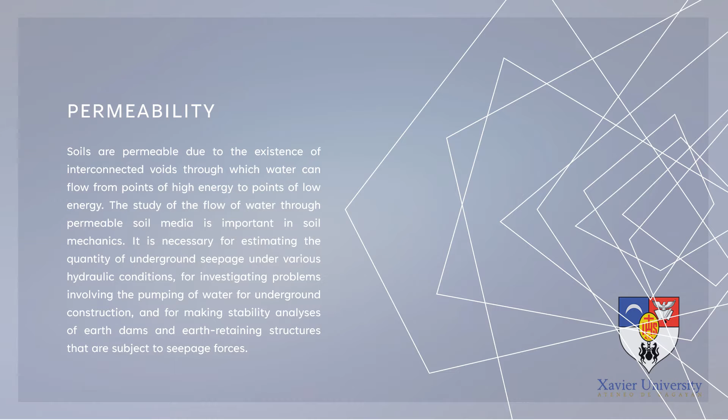So the study of the flow of water through permeable soil media is important in soil mechanics. It is necessary for estimating the quantity of underground seepage under various hydraulic conditions, for investigating problems involving the pumping of water for underground construction, and for making stability analysis of earth dams and earth retaining structures that are subject to seepage forces. So I know we are all familiar with Bernoulli's equation.

So from fluid mechanics, we know that according to Bernoulli's equation, the total head at a point in water under motion can be given by the sum of the pressure, the velocity, and the elevation heads. H, or the total head, is equal to the pressure head, which is equal to pressure over the unit weight of water, plus the velocity head, which is equal to velocity squared over 2 times the acceleration due to gravity, plus elevation head, which is equal to z.

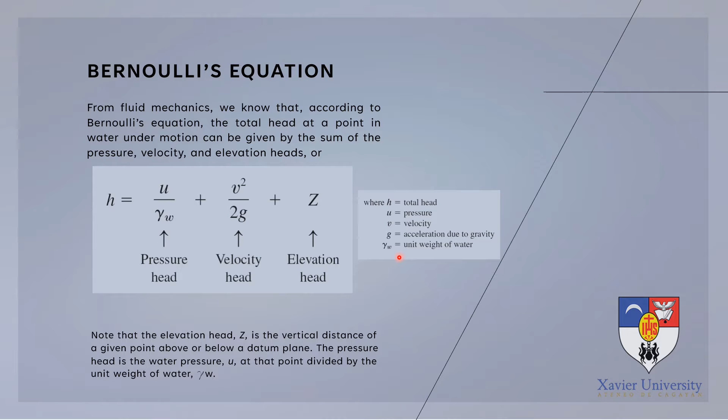So note that the elevation z here is the vertical distance of a given point above or below a datum plane. The pressure head is the water pressure U at that point divided by the unit weight of water, or gamma water. So if Bernoulli's equation is applied to the flow of water through a porous soil medium, the term containing the velocity head can be neglected because the seepage velocity is relatively small, and the total head at any point can be adequately represented by this one.

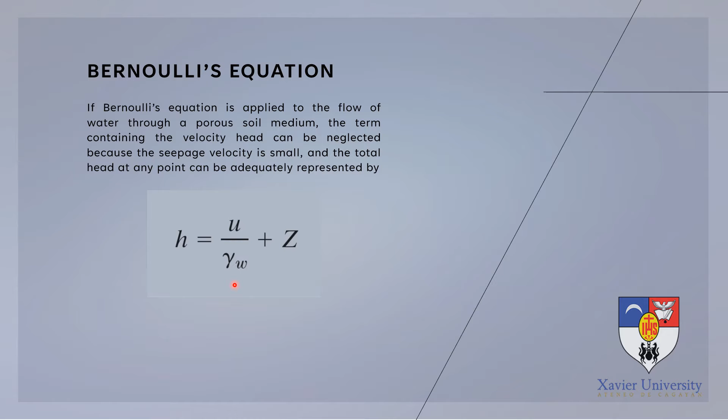As we have learned in our fluid mechanics subject, we have gotten to know the piezometers, which are open standpipes that are inserted into the porous soil, so we can get the pressure of the water inside. So open standpipes called piezometers are installed at points A and B. The levels to which water rises in the piezometer tubes situated at points A and B are known as the piezometric levels of points A and B respectively.

The pressure head at the point is the height of the vertical column of water in the piezometer installed at that point. Upon the insertion of this piezometer into the porous soil, the water will rise, and the pressure head at this point is the height of the vertical column of the water in this specific piezometer.

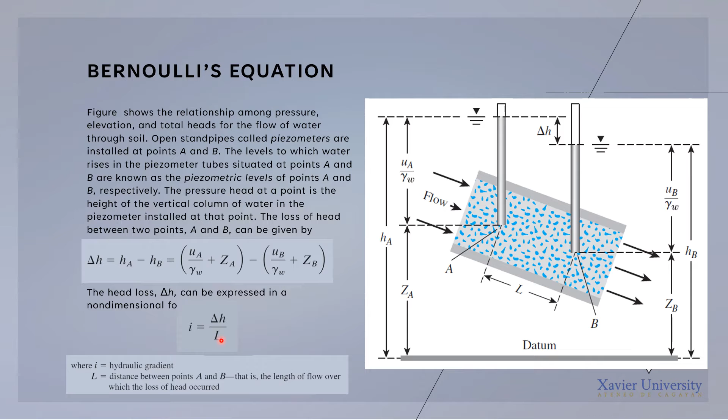So actually, hydraulic gradient plays a very big role when it comes to flow of water in a porous soil. So this formula can also be used interchangeably, whenever applicable, together with these equations.

So let us talk more about hydraulic gradient. So when the hydraulic gradient is increased gradually, so meaning hydraulic gradient, it is actually slope, no? The rise, which is the head loss, over the length of the flow of water, or the distance between 2 points. So hydraulic gradient is a slope. So if it is increased gradually, the flow remains laminar, no?

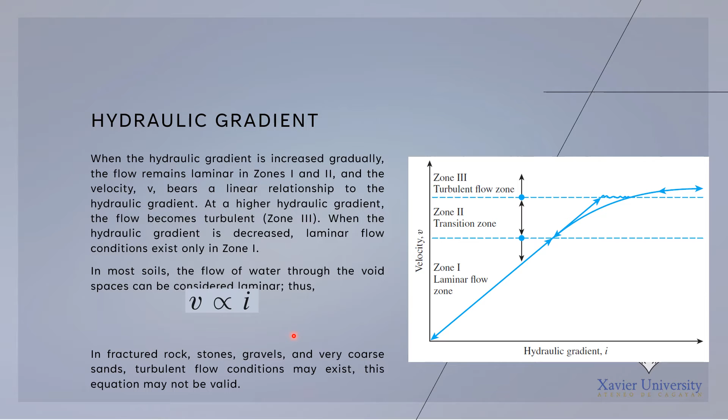So, when the hydraulic gradient is decreased, laminar flow conditions exist only in zone 1. So, in most soils, the flow of water through the void spaces can be considered laminar. So, meaning, this can be interpreted through the expression, velocity is directly proportional to the hydraulic gradient. So, in fractured rocks, stones, gravels, and very coarse sands, turbulent flow conditions may exist. So, this equation may not be valid.

So, now let us talk about Darcy. So, in 1856, Darcy published a simple equation for the discharge velocity of water through saturated soils, which may be expressed as V is equal to Ki. So, V in here is the discharge velocity, which is the quantity of water flowing in unit time. And K in here is the hydraulic conductivity, or our coefficient of permeability. So, this equation was based primarily on Darcy's observations about the flow of water through clean sand.

So note that these two equations below are similar and both are valid for laminar flow conditions and applicable for a wide range of soils. Our discharge velocity is directly proportional to our hydraulic gradient. So if we convert this statement or expression into an equation, we would have to replace this symbol here with the equal sign, and we would have to add the coefficient here, which is the letter K, which represents our coefficient of permeability.

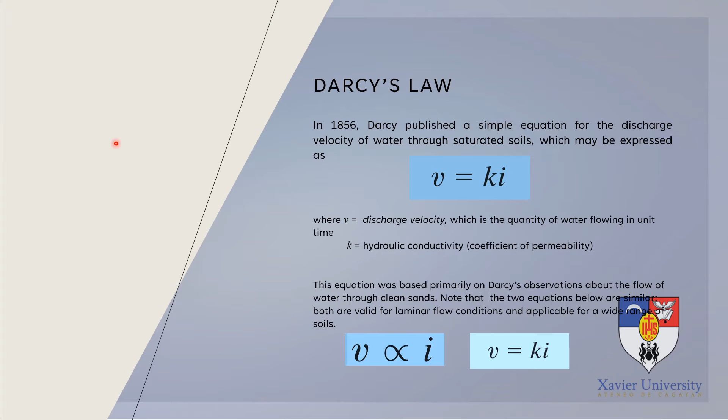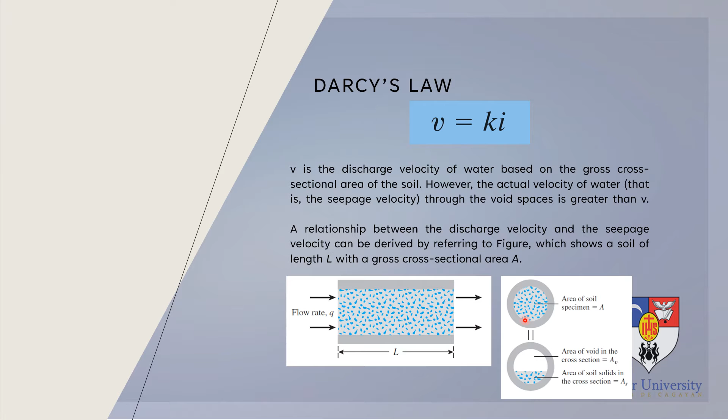Alright, so if the quantity of water flowing through the soil in unit time is Q, we know that Q is the rate of flow, which is equal to A times the discharge velocity, or equal to the area of the voids times the seepage velocity, or seepage velocity is equal to the discharge velocity over the porosity.

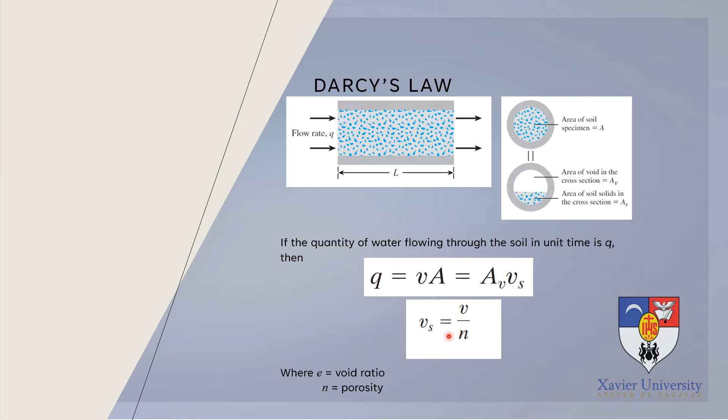So now let us talk about hydraulic conductivity. V is equal to Ki according to Darcy. We have already talked about the i, which is the hydraulic gradient, and the Q, which is the rate of flow. And now let us talk about the letter K, and what does it represent? That is the hydraulic conductivity. It is the ability of the porous medium, or the soil, for instance, to transmit water under saturated or nearly saturated conditions. So this is a measure of how much a soil can transmit water through it.

So hydraulic conductivity is generally expressed in centimeters per second or meters per second in SI units, and in feet per minute or feet per day in English units.

The hydraulic conductivity of soils depends on several factors: fluid viscosity, pore size distribution, grain size distribution, void ratio, roughness of minerals, and degree of soil saturation. In clay soils, structure plays an important role in hydraulic conductivity. Other major factors that affect the permeability of clays are the ionic concentration and thickness of layers of water held on to the clay particles.

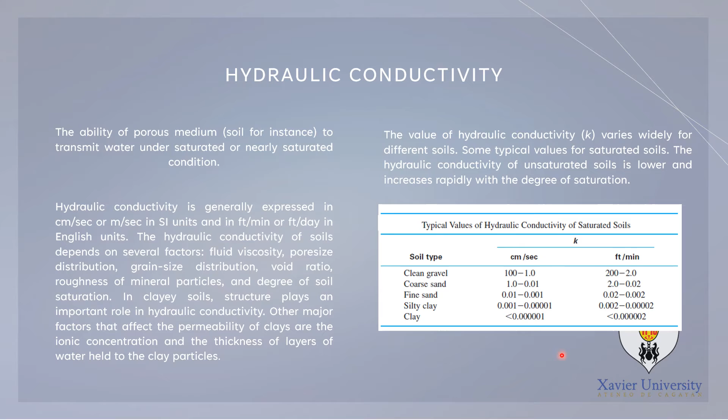The hydraulic conductivity of a soil is also related to the properties of the fluid flowing through it by an equation: K is equal to gamma water over the viscosity of water, times the absolute permeability. So this is another equation for our hydraulic conductivity if we base our determination of it on the properties of the fluid flowing through our soil.

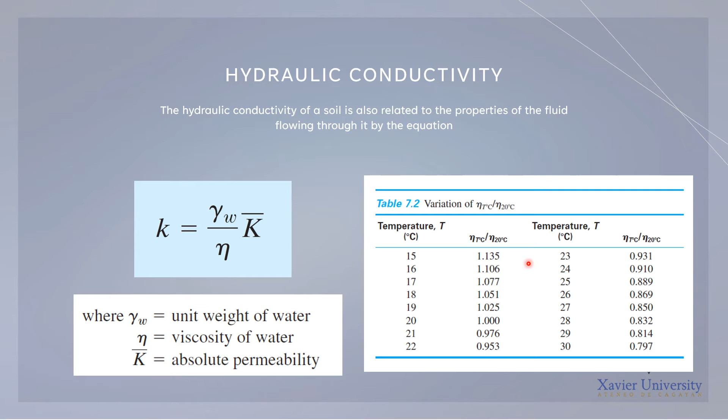As much as other properties of our soil, the determination of the hydraulic conductivity of our soil can also be done in the laboratory through two most common methods: the constant head permeability test and the falling head permeability test.

Let us first talk about the constant head permeability test. A typical arrangement of the constant head permeability test is shown in this figure. In this type of laboratory setup, the water supply at the inlet is adjusted in such a way that the difference of head between the inlet and the outlet remains constant during the test period.

After a constant flow rate is established, water is collected in a graduated flask for a known duration. The total volume of water collected in this flask may be expressed by the equation Q equals A times V times T, where the discharge velocity is equal to K times I. The hydraulic gradient I is equal to the slope, H over L, the pressure head over the length of flow.

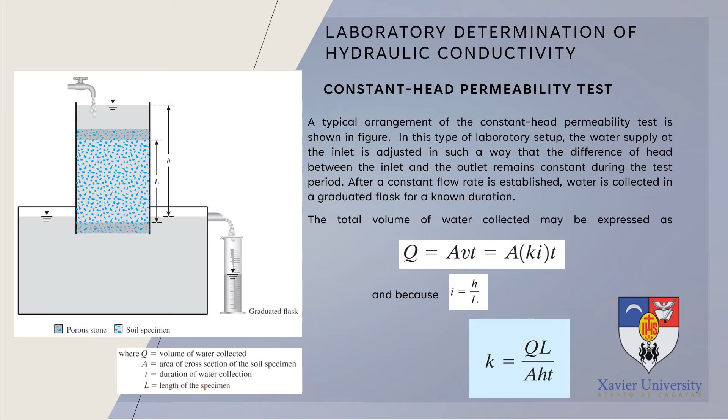So this water will be allowed to penetrate this soil over a certain period of time. That time is what the letter T represents here. So now let us talk about the falling head permeability test.

The mechanism is the same. Water will be allowed to penetrate the soil, and then measurement will be conducted later on. Its appearance is just different - we have a standpipe.

Now, this is the typical arrangement of the falling head permeability test. Water from a standpipe flows through the soil here, and it will penetrate our soil.

So the initial head difference H1 - we have H1 here - at time t equals 0 is recorded, and water is allowed to flow through the soil specimen such that the final head difference at time t2 is H2.

If we put water, we measure that as H1, and then we allow that water to penetrate this soil over time until it goes down, since some of it penetrates and some other water moves in. So that water level that was originally here goes down since some has penetrated. That is our H2 at time 2.

So we can compute our hydraulic conductivity, which is denoted by small letter k. It's the same as in constant head permeability - what we solve for here is the hydraulic conductivity or the coefficient of permeability, which is the letter K in the formula.

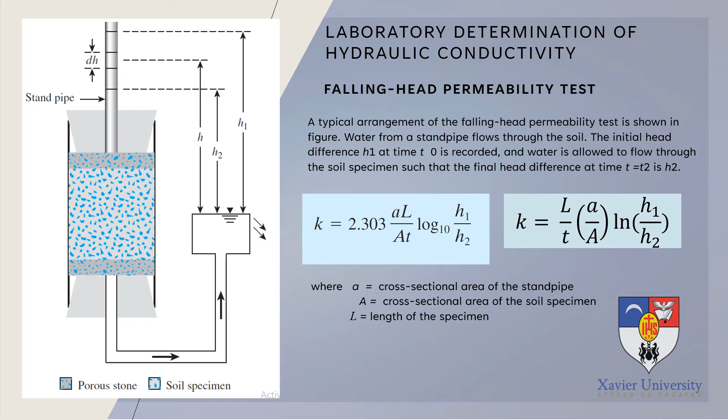Okay, so we have here a sample problem. First, let us have a sample problem for the constant head permeability. We have here figure A. A test gives these values - L is already given, A is already given, constant head difference H is given, water collected in a period of 5 minutes - that time is 5 minutes. The volume of water collected is 350 cubic centimeters.

As always, in any problems that we have to deal with, we have to be very careful of the units given and the units we are asked for. So in cases where 5 minutes is given as the time, and it asks to calculate the hydraulic conductivity in centimeters per second - the centimeters part is fine since everything matches - but the 5 minutes we have to convert later into seconds.

So when we talk about constant head permeability, there's only one equation we automatically use: K is equal to QL over AHT. Given Q, which is 350 cubic centimeters, L is 30 centimeters, A or the area of the specimen is equal to 177 square centimeters, our constant head is equal to 50 centimeters, and the time of our test is 5 minutes, which we have to convert into seconds.

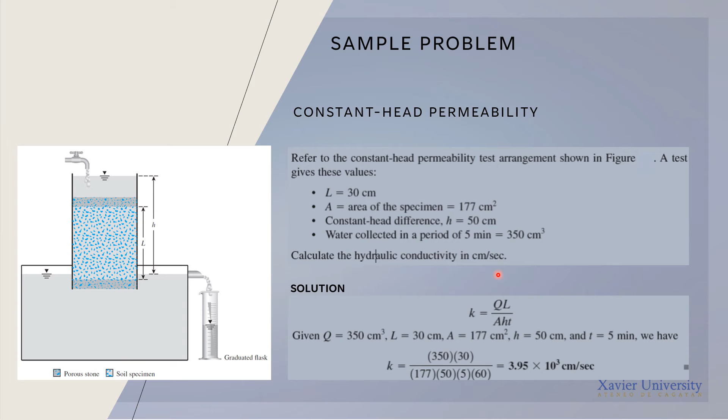So for the falling head permeability test, there's only one formula to use here. The problem will give values for the length of the specimen, the area of the soil specimen, and the area of the standpipe, which is the small letter a and the big letter A.

And the head difference at time 0, or H1, which is equal to 20 inches, and H2 after 180 seconds, which is our T, H2 now becomes 12 inches. So we are asked to determine the hydraulic conductivity of our soil in inches per second. All our units are fine since we're already in inches and seconds.

So automatically, when given a problem about falling head permeability test, we use this formula, the one with ln. It's actually easier to memorize, and in the board exam it is more commonly used than the other one, because there's less to write.

Anyways, in this problem by Braja Das, he is using this formula. Actually, if you use the other equation, you will still arrive at the same value for your hydraulic conductivity. So this is the formula for our hydraulic conductivity.

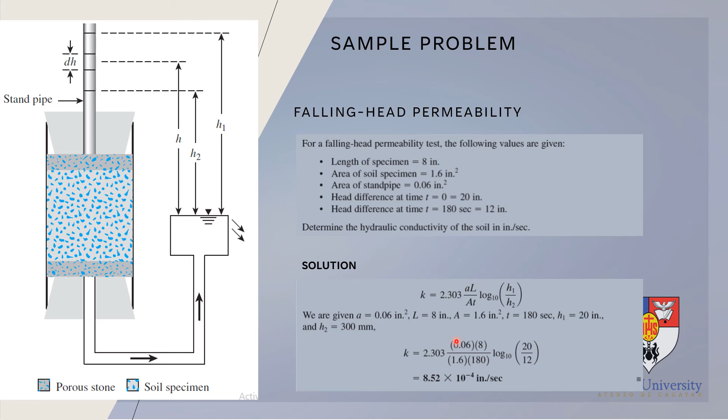So basically, board exam problems related to this somehow just look like this. You just have to memorize the formula and then identify which parameter is given, so you can correctly substitute to come up with the right answer.

So basing on a problem about hydraulic conductivity, if the given is only the void ratio, D10, and Cu, for granular soil, depending on what's given — if those earlier ones like H, area of the specimen are not stated — you are asked to solve for the hydraulic conductivity using what is given in the problem.

So at least you know that there are equations that exist establishing the relationships for hydraulic conductivity. It also applies to cohesive soils, where we have the void ratio. So you can solve the hydraulic conductivity if those parameters, data, or properties of the soil are given.

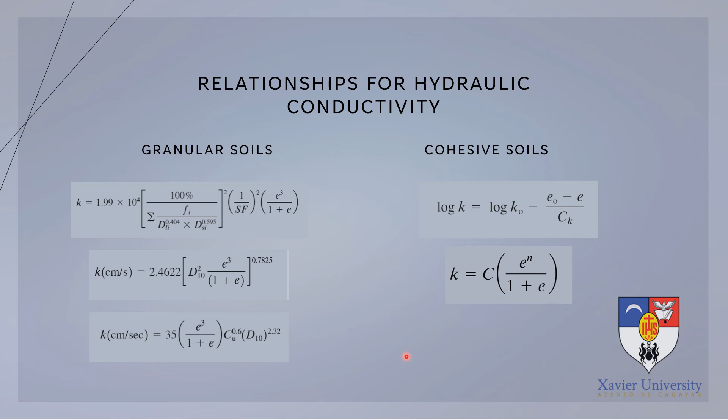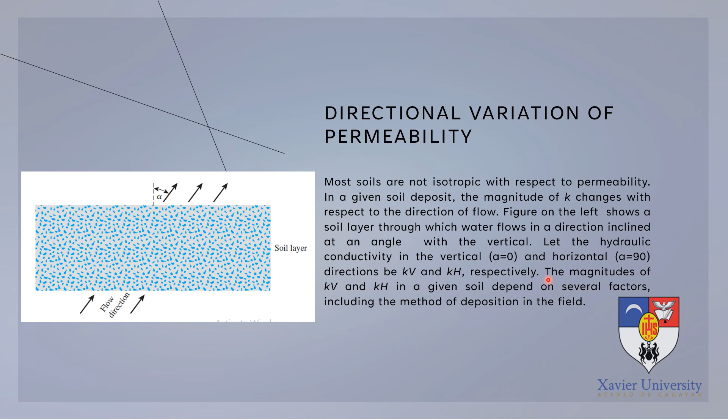Murag gi-anticipate lang niya, no? Now, what if the flow of the water is at an angle with the vertical? So we have to get the K equivalent in the vertical and horizontal, which is KV and KH respectively. The magnitudes of KV and KH in a given soil depend on several factors, including the method of deposition in the field.

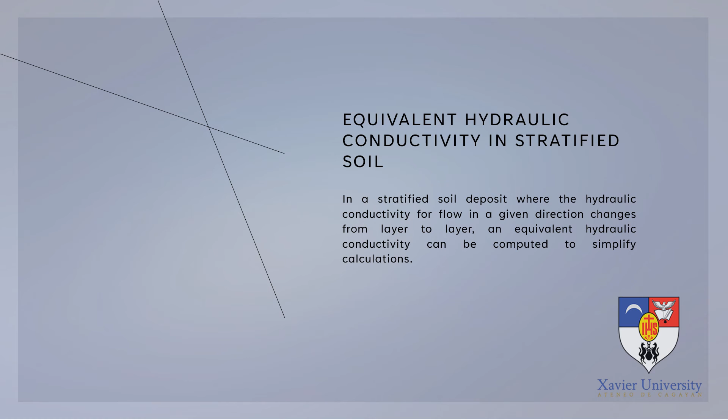So we have the equivalent hydraulic conductivity in stratified soil. In a stratified soil deposit where the hydraulic conductivity for flow in a given direction changes from layer to layer, an equivalent hydraulic conductivity can be computed to simplify. So if the problem is asking us for the equivalent hydraulic conductivity in the horizontal direction, muna siya nga formula atong gamiton.

Kay murag gibutang niya in consideration nga ang flow of the water within our soil strata is not uniform. It could be at an angle with the vertical, or in any other direction. So at least we can get the horizontal and vertical equivalent of our hydraulic conductivity regardless of the direction of flow. So, diretso lang ta.

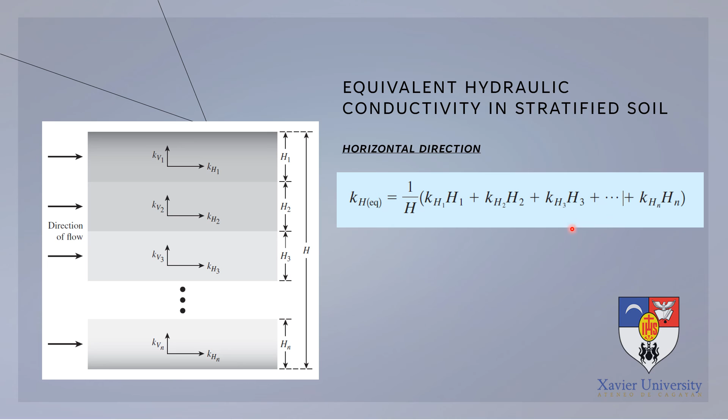The formula for KH equivalent is equal to 1 over H, which is the total thickness of our soil strata, times KH1 H1. K here is the coefficient of permeability in this specific layer 1. Layer 1 has its own hydraulic conductivity and its specific height. So multiply them for each layer, and then sum up each product: KH1 times H1, KH2 times H2, KH3 times H3. Isum lang nimo, then you will get your KH equivalent.

For the vertical direction, same parameters gyapon. Still H, which is the total thickness, and H1, the thickness of layer 1, and the hydraulic conductivity of layer 1. But instead of a product, you have to divide the thickness of that layer by its hydraulic conductivity. So when asked for the equivalent hydraulic conductivity in the vertical direction, automatically this is the equation that we are going to use.

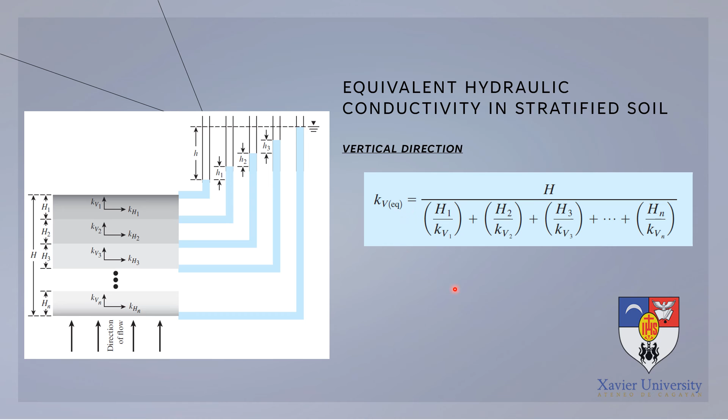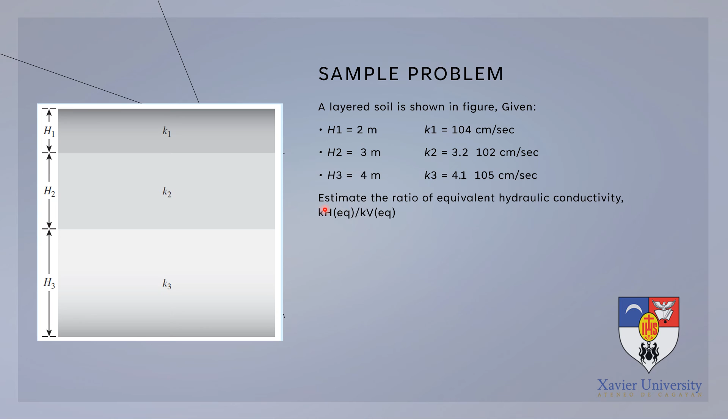So we have here a sample problem: a stratified soil with 3 layers. Given ang H1, H2, and H3 and their specific hydraulic conductivities K1, K2, and K3. So in this case the hydraulic conductivity of each layer of our soil is determined. We have to estimate the ratio of the equivalent hydraulic conductivity KH over KV, so you have to compute for KH and then KV.

Automatic lang, use the formula for KH earlier, and then substitute the values for the total thickness, which is H1 plus H2 plus H3, and then K1, which is 10 to the negative 4, times H1, which is 2. Sum all their products, and you will get the KH equivalent, which is equal to 107.07 times 10 to the negative 4 centimeters per second.

The same with the vertical direction equivalent hydraulic conductivity, the equation is already given. You just have to substitute the given values to come up with the answer. The K vertical equivalent is equal to 0.765 times 10 to the negative 4 centimeters per second. Since the problem asks for the ratio of the horizontal over the vertical equivalent, we just divide them, and we come up with a ratio equal to 139.96.

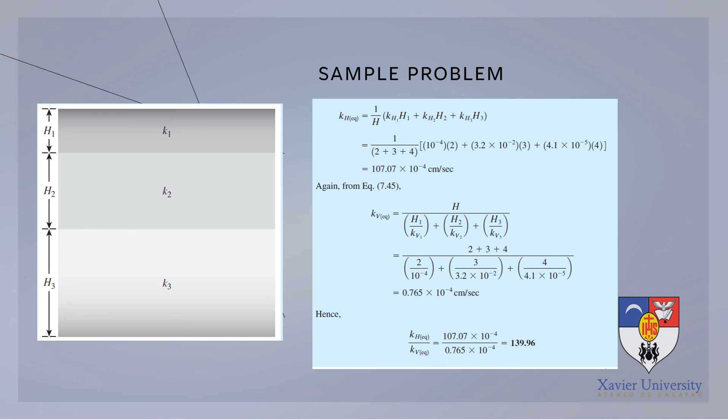So cubic centimeter per hour is actually the rate of flow. The volume over time is actually the rate of flow, that is equal to Q = KIA, wherein ang atong gamiton na K dire is the equivalent nga katong vertical, kay ang flow sa atong water dire is vertical man.

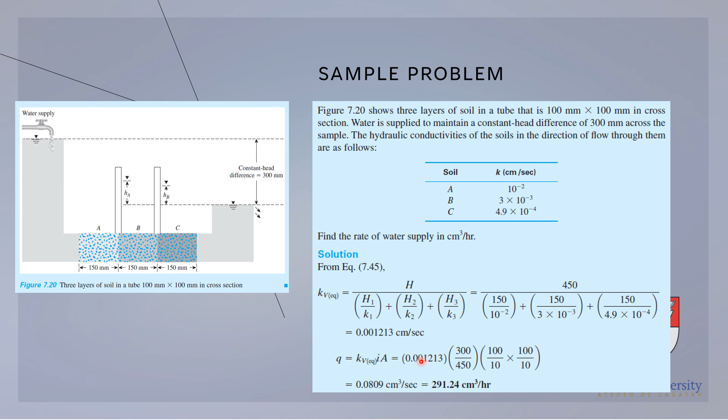So we just have to use the formula to get the equivalent, no? And then that K is now what we use as our governing K or hydraulic conductivity in the computation of our rate of flow. So we just have to substitute all the given values to come up with our answer.

So we also have another method of permeability test in the field, which is through pumping from wells. So in the field, the average hydraulic conductivity of a soil deposit in the direction of flow can be determined by performing pumping tests from wells, aside from the laboratory tests, which are the constant head and the falling head. If we try to determine the hydraulic conductivity on site or in the field, this is how we determine it.

So during the test, water is pumped out at a constant rate from a test well that has a perforated casing. Several observation wells at various radial distances are made around the test well. Continuous observations of the water level in the test well and in the observation wells are made after the start of the pumping until a steady state is reached. The steady state is established when the water level in the test and observation wells becomes constant.

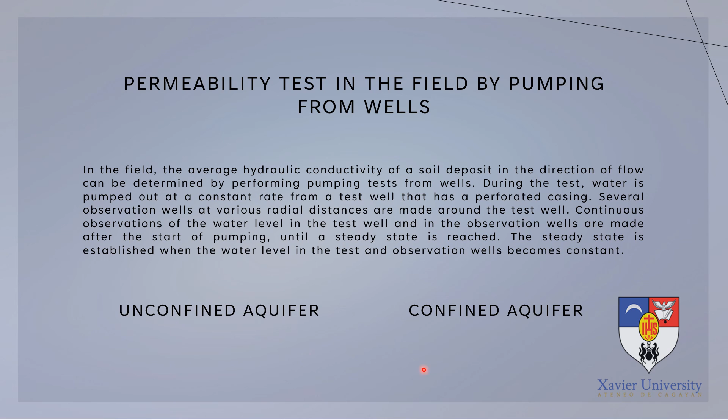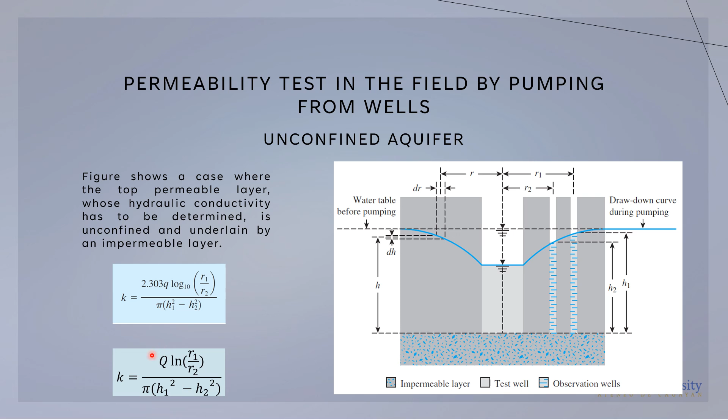So as well as for the confined aquifer. The average hydraulic conductivity for a confined aquifer can also be determined by conducting a pumping test from a well with a perforated casing that penetrates the full depth of the aquifer, and by observing the piezometric level in a number of observation wells at various radial distances, R. Pumping is continued at a uniform rate Q until a steady state is reached.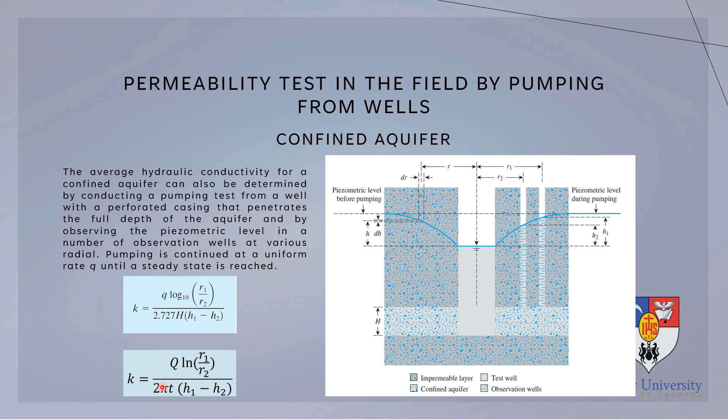So, again, if you are given a problem about confined aquifer and you're asked for the hydraulic conductivity, you just have to use this established formula to arrive at the hydraulic conductivity being asked in the problem. So anyways, in the problems related to confined and unconfined aquifers, the data or the illustration like this one will always be given. So it's up to you to memorize the formula for that. So that would be all for the permeability of soil.